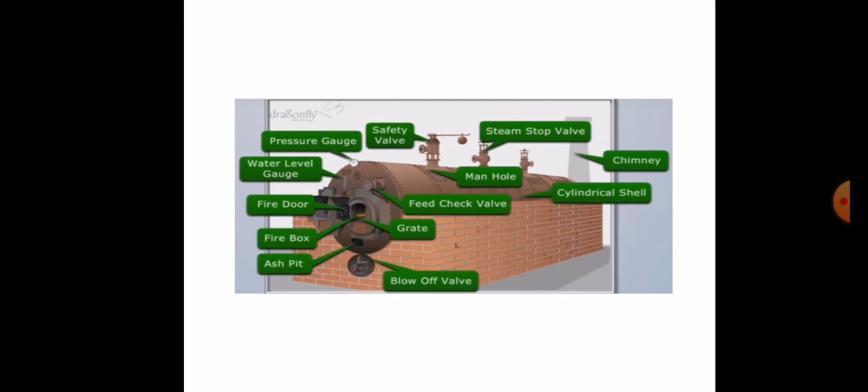First of all, basically you must know about the function of mounting, and where it is used. So over here you can see boiler mountings. Mountings means what? These are the necessary devices without which we can't operate the boiler, and also safety purpose is required for this type of mountings. So basically we can say, without mounting we can't operate the boiler.

Over here you can see following are some of the important boiler mountings. First one, this is the water level indicator. What is the function of water level indicator? Just the name is enough. Indicator means it indicates the level of the water inside the boiler or drum.

Second thing, this is the pressure gauge. Pressure gauge means it measures the pressure of steam. Generally we can say pressure is equal to force by area, but particular pressure gauge means whatever steam will be generated through the boiler, at that time how much amount of pressure we want to see, for that pressure gauge we are using.

Third thing, this is the safety valve. Safety valve means what? Suppose the steam pressure increases beyond the range, so at that time safety valve will be operated, and you can recover from this type of high pressure. So four types of safety valve we are using, which we will discuss later, but four types we will consider: dead weight safety valve, lever safety valve, spring loaded safety valve, and high steam low water safety valve.

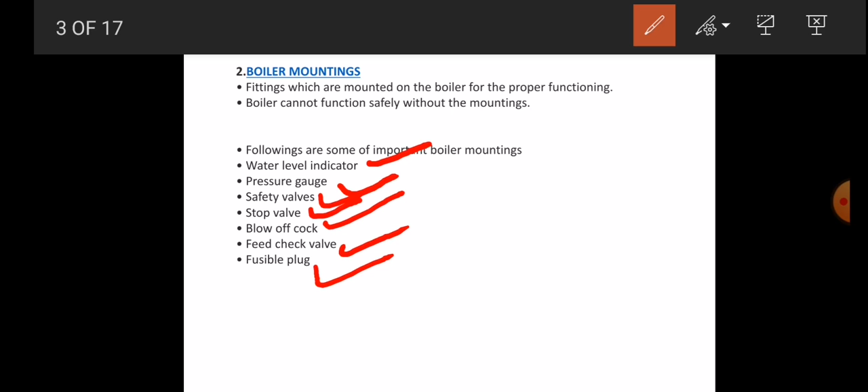So these are, we can say, the boiler mountings. And mountings are the necessary devices, as I already told, so without mounting we can't operate the boiler.

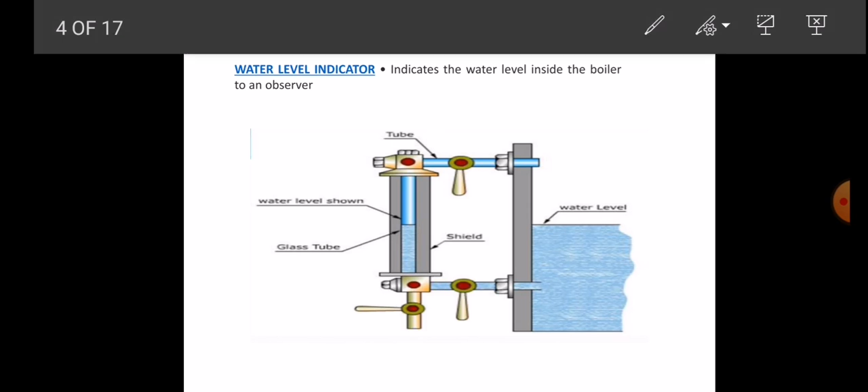So further we can go ahead. This is the water level indicator, already I told. So over here this is the figure. So this is the water level, and on the upper side you can see this is the steam. Over here this type of glass tube is present.

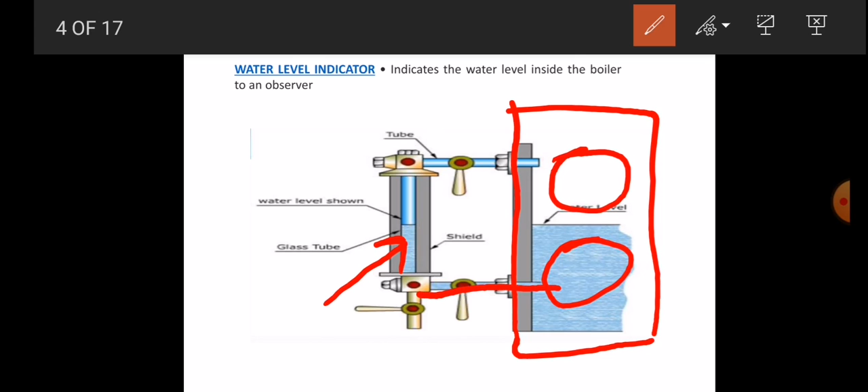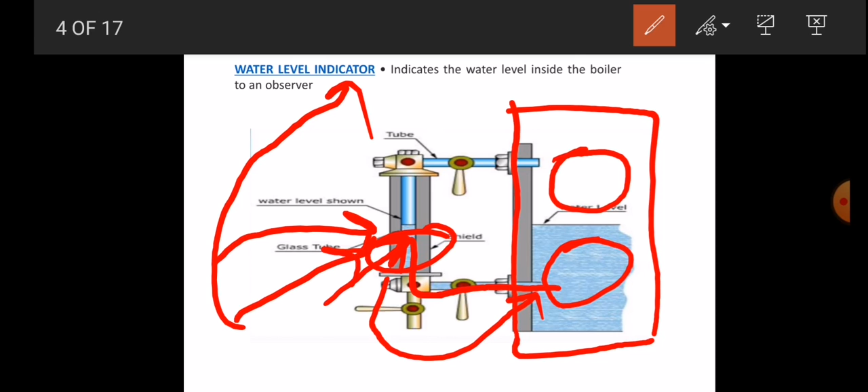So suppose this is our boiler shell, in which we are feeding the water. So how much amount of water will be filled inside the boiler drum, that water will go into this glass tube, and we can easily observe how much amount of water is filled inside the boiler or drum. So this is how we know about the level of the water, which is the main function of the water level indicator.

So further, pressure gauge.

So generally in boiler we are using Bourdon tube pressure gauge, which measures the pressure inside the boiler steam. So generally over here you can see this is the Bourdon tube pressure gauge.

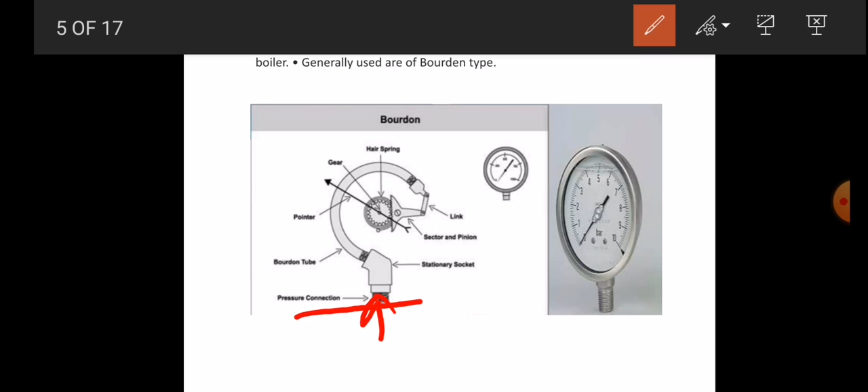So over here how it works, this is the pressure connection. This is the boiler where steam will be generated. So steam will go into this direction, and you can see this is the Bourdon tube, this shape.

So the pressure of the steam, which goes into this tube in this direction, at that time this link is directly connected with the Bourdon tube. So whenever steam goes inside the tube, a little bit of pressure will be generated, and due to that, this pinion will also move in this direction.

Over here you can see this is the gear, and both are connected with each other. So when the pinion moves, the gear will be rotating. With the help of the gear, there is one pointer known as the needle, and the needle will also rotate in the upper direction.

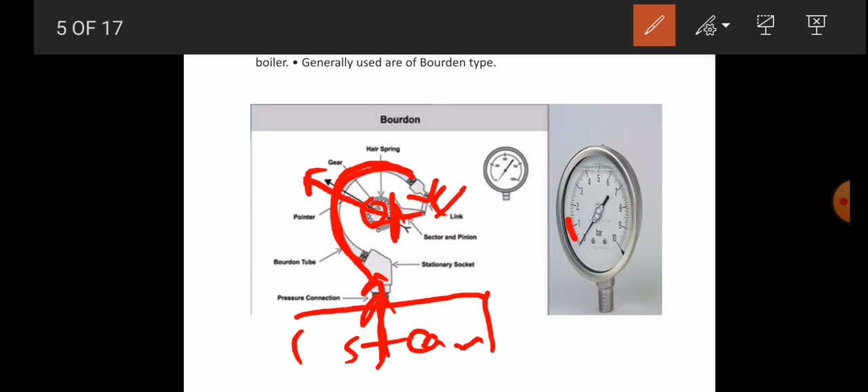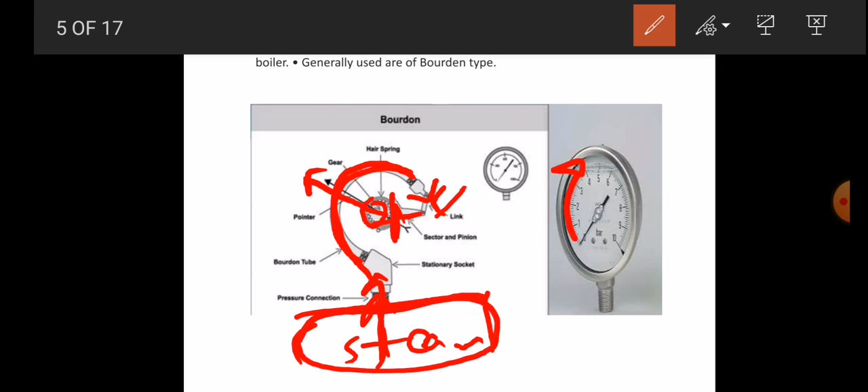So this needle goes into the upper direction, and generally we can consider this amount of pressure is the steam pressure generated. So this is the basic function - the pressure gauge indicates the pressure inside the boiler or drum.

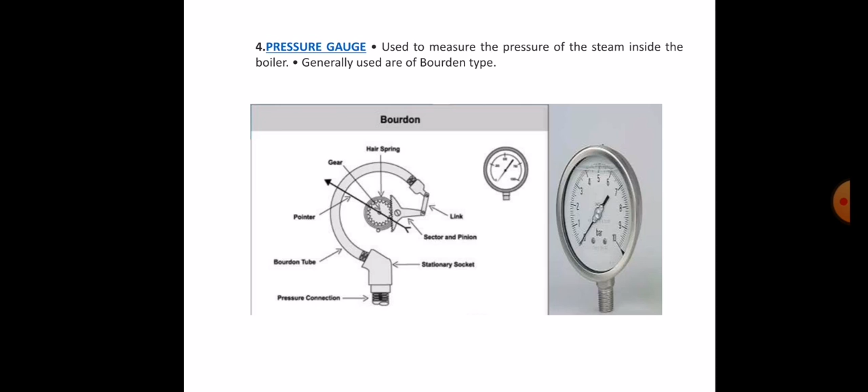Okay, further we can go ahead. Safety valve, which I already told you where it is used and its location. So four types of safety valve. Excessive internal pressure of the steam will be reduced through this valve, that's why it is called the safety valve.

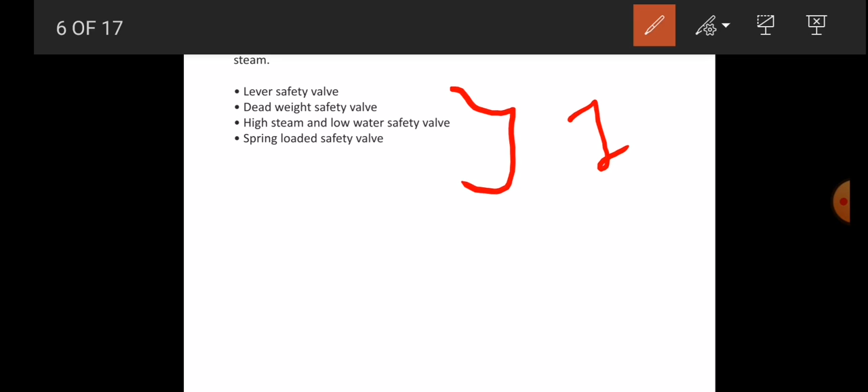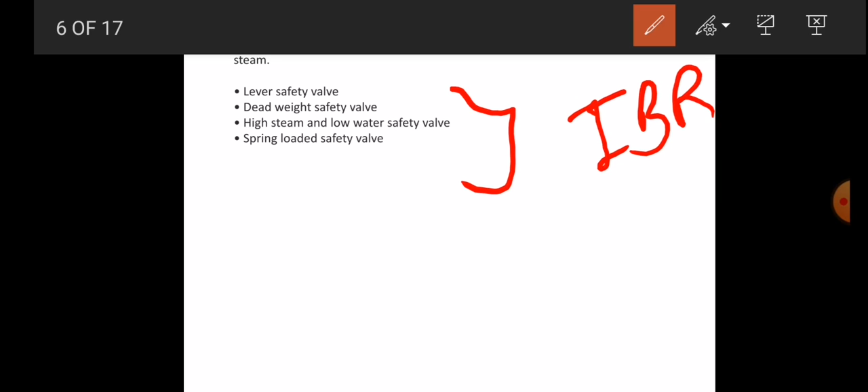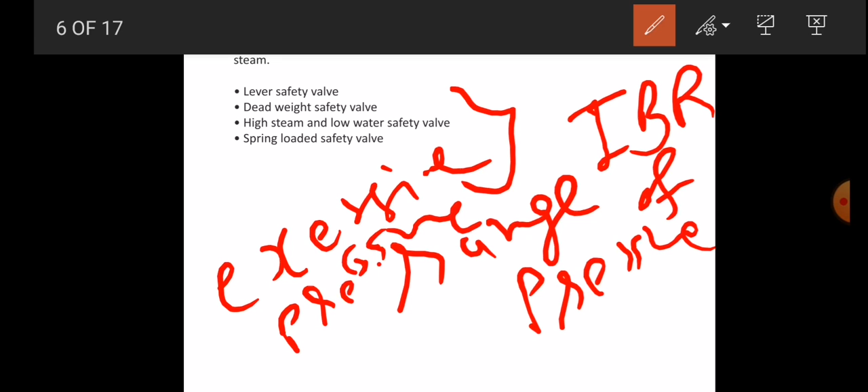So why is a safety valve required according to IBR? We all know about the classification of the boiler. According to IBR, there is a recommended range of pressure. Suppose the pressure increases above the range for that particular boiler, at that time the safety valve will work, and excessive pressure will be reduced or displaced from that particular boiler. That's why this type of safety valve is used.

Okay, over here, lever safety valve - one lever is there, one end is fixed. Dead weight safety valve - it is also used at home, like in a pressure cooker. So in between we are using the dead weight safety valve.

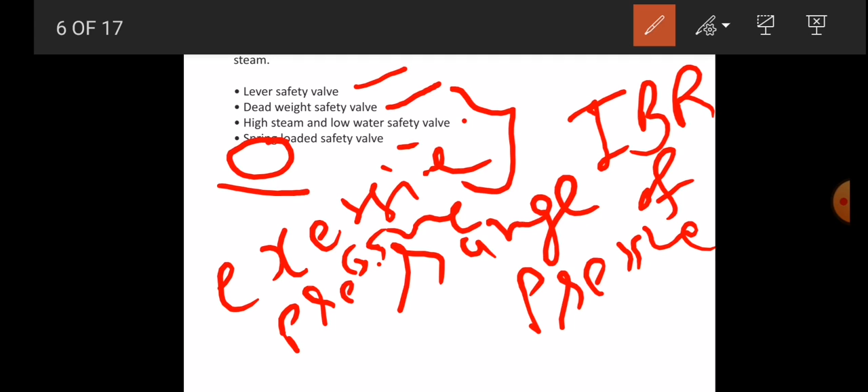Okay, high steam and low water safety valve and spring loaded safety valve. Spring loaded safety valve basically uses a spring, that's why it is known as the spring loaded safety valve. So safety valves are used in a particular boiler to remove that excessive pressure. Okay, further we can go ahead.

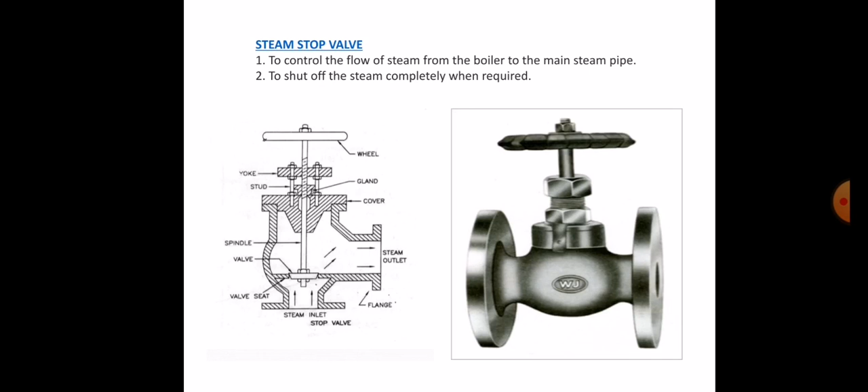Steam stop valve - over here you can see it controls the flow of steam from the boiler to the main steam line. Otherwise, we can use it to shut off the steam completely when required.

So over here you can say this is the handle, or we can call it the wheel. With the help of the hand wheel we can control that. It is connected with the spindle - this wheel is connected with the spindle.

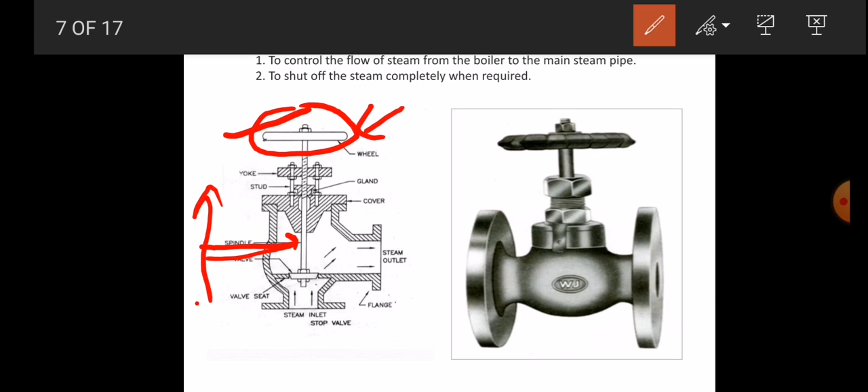So whenever it is rotated by us, the spindle goes up and down direction. So in this up and down direction, whatever steam goes inside, the spindle goes into the upward direction, so steam will go in this direction. Over here we are using a gland for the packing purpose, for the leakage purpose.

So steam is connected with the steam pipe, and the steam pipe is directly connected into the steam turbine where we use this steam.

So whenever steam is not required, this hand wheel is also rotated, so the spindle goes into the downward direction and gets fixed, so no steam will be passed through this direction.

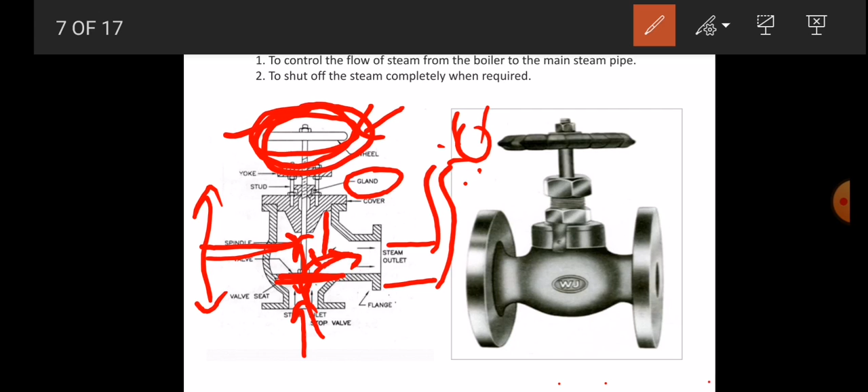So whenever steam is required, at that time we are using the steam stop valve to regulate the steam. Okay, further we can go ahead.

Blow off cock. What is its function? Whenever we need to empty the boiler, suppose whatever water is inside the boiler or drum, and we are cleaning inside the boiler or drum, at that time water will be emptied through the blow off cock to discharge the mud, scale or sediments which are accumulated at the bottom of the boiler, right? So over here you can see this is the blow off cock, for removing the dirt material, as I already told you. So this type of figure, right?

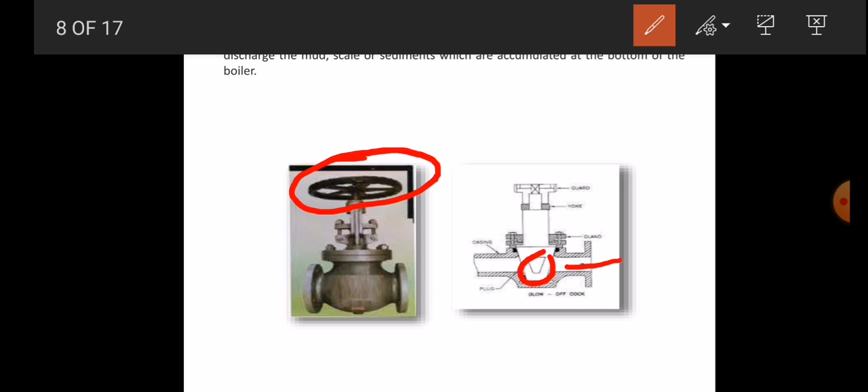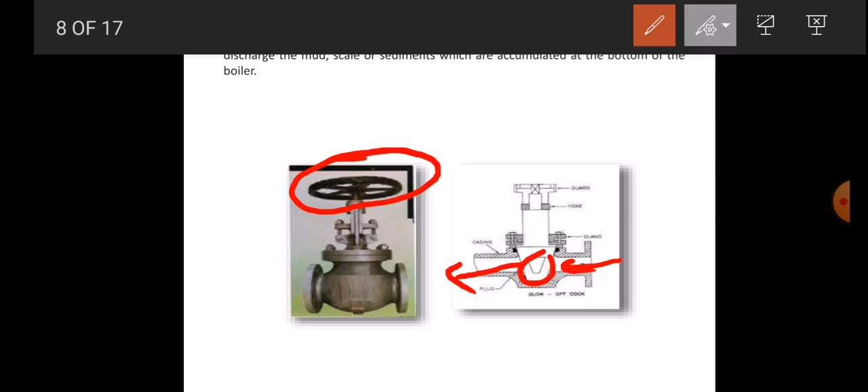Over here you can see this is the wheel. Whenever it is rotated, this type of block will go in the upward direction, and whatever mud is there will come out. So blow off cock is generally always mounted on the lower side of the shell, because, as we all know, due to gravity some sediments or foreign particles are always deposited inside the boiler or drum at the lower side. So due to the blow off cock we can remove all that dirt, scale or sediments.

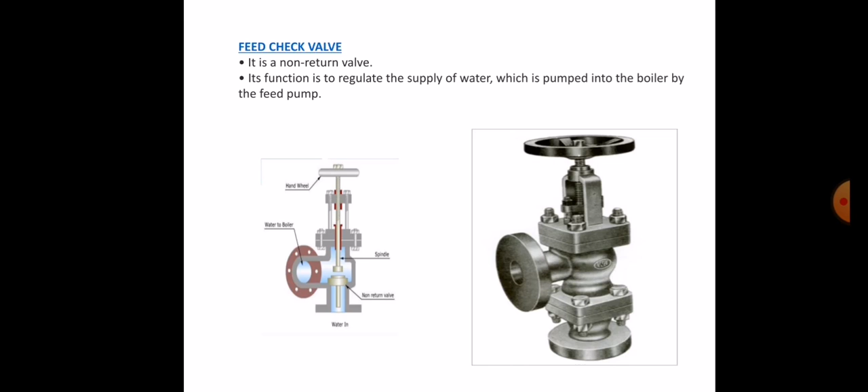Okay, feed check valve. It is a non-return valve. Its function is to regulate the supply of water which is pumped into the boiler by the feed pump, right? So a pump, basically, is a device which moves liquid from one place to another, but over here through that particular feed check valve we are inserting the water into the boiler, right?

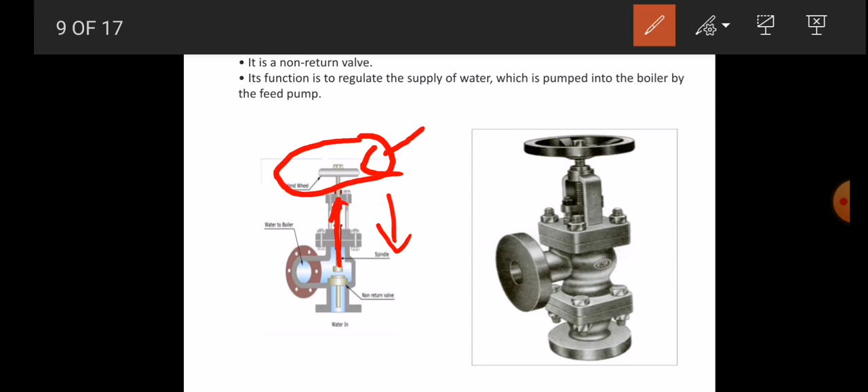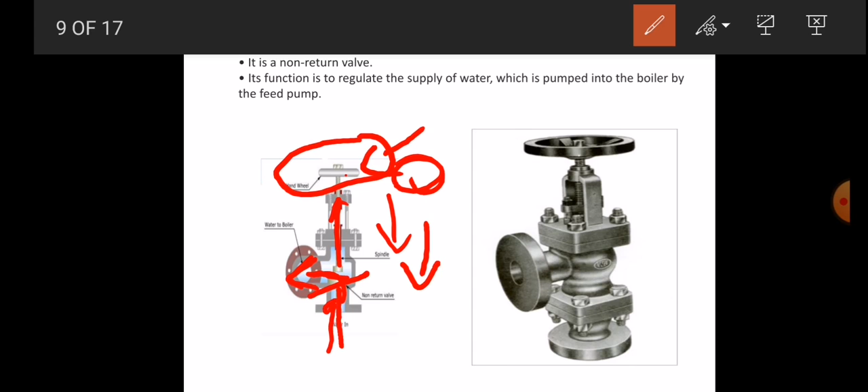So over here also you can see this is a hand wheel. Whenever it is operated by us, the spindle moves in the upward as well as downward direction. Whenever it goes in the upward direction, whatever water is there goes into the boiler drum. Whenever it is rotated in the other direction, the spindle goes into the downward direction, so it gets fixed and no water goes into the boiler. So the feed check valve generally supplies or regulates water inside the boiler or drum.

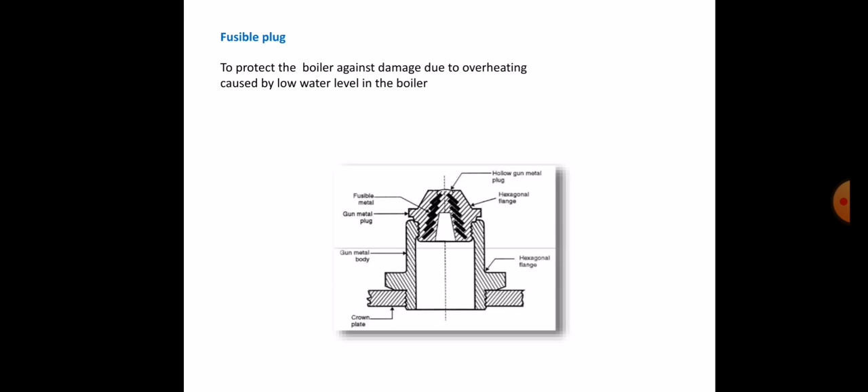Okay, further we can go ahead. Fusible plug - as already told, its function is to protect the boiler against damage due to overheating caused by low water level in the boiler. We all know that in the boiler we are inserting water, right? So after giving heat, what happens? Water converts into steam, so the water level will be reduced after some time, right?

So at that time, suppose the water level is reduced, but in spite of that we are still supplying heat, right? So this type of overheating problem may occur. So over here you can see the figure - here the hexagonal flange, this is one portion, this is the second portion, and in between, over here, you can see this in black color, this is a fusible metal.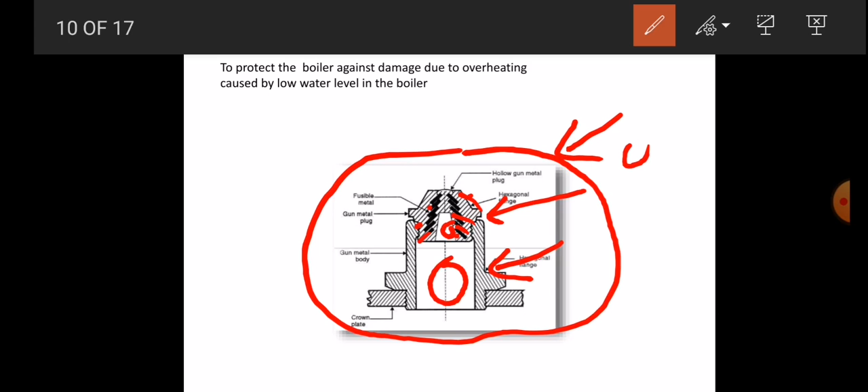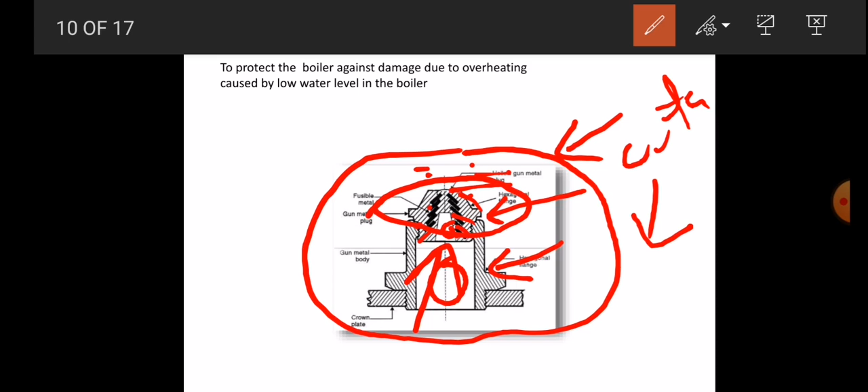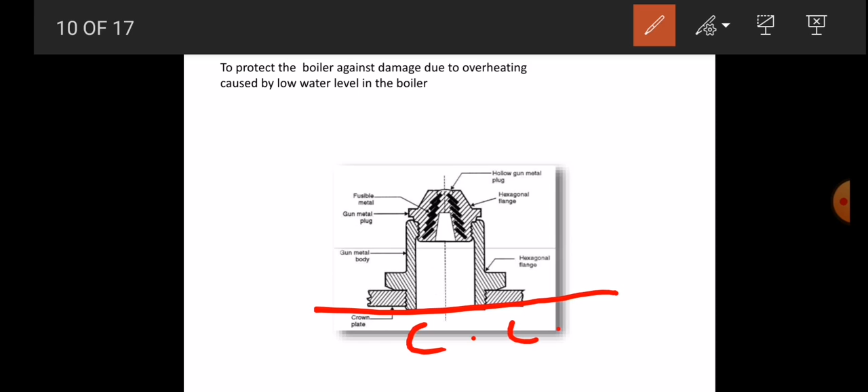So initially it is totally covered inside the water, but whenever the water level is reduced, this upper portion becomes uncovered from the water. At that time, when you are supplying heat, this fusible metal will melt, and whatever remaining water is there goes inside the combustion chamber. So over here you can see, in between, the combustion chamber - a little bit of water goes into the combustion chamber, and at that time the fuel combustion stops, reducing the overheating problem.

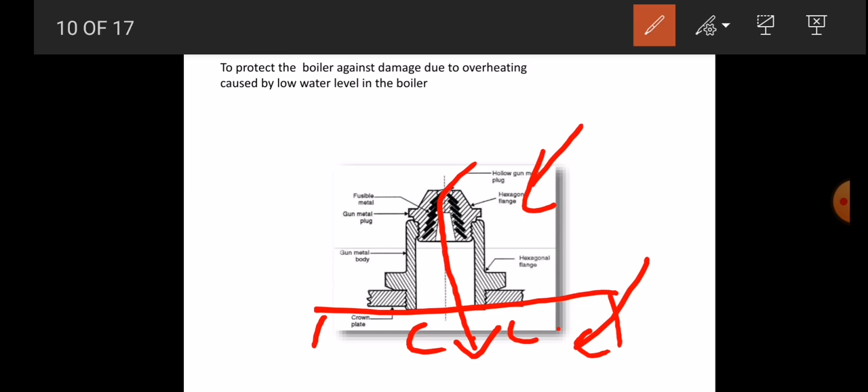That's why we are using the fusible plug, and the fusible plug is always mounted on the combustion chamber, because in the combustion chamber we combust that particular fuel. Now, fuel means what? Fuel is a substance composed mainly of carbon and hydrogen and produces a large amount of heat when burning with oxygen. Okay, so this is the fusible plug.

After this we are going to boiler accessories. Mounting, the necessary devices, we all know without mounting we can't operate the boiler. But boiler accessories are the devices we use to increase the efficiency of the boiler.

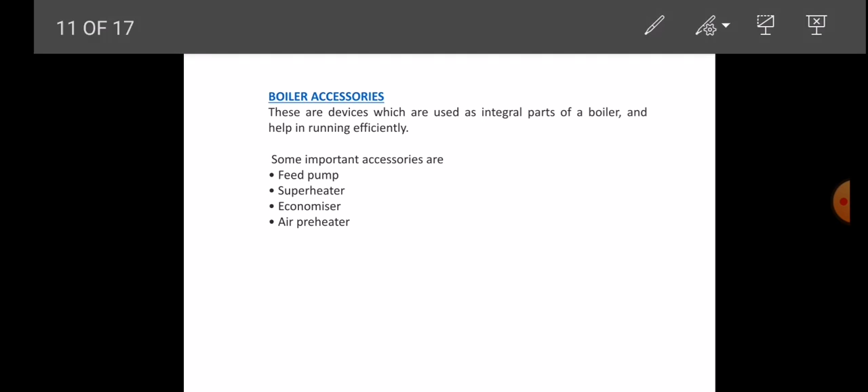So some important accessories you can see here: feed pump, superheater, economizer, and air preheater. This type of accessories will be discussed one by one.

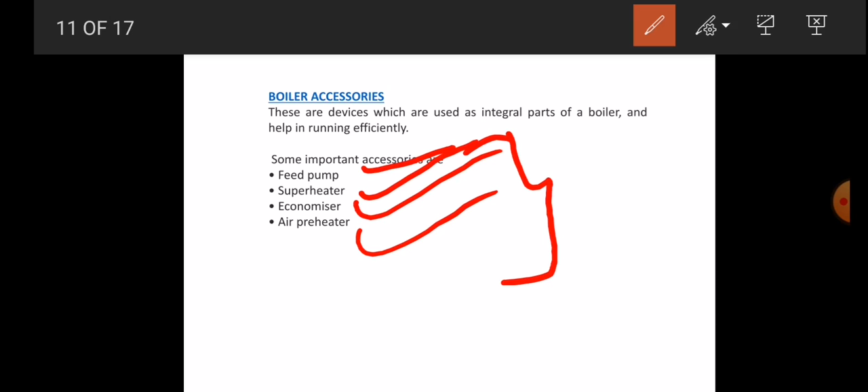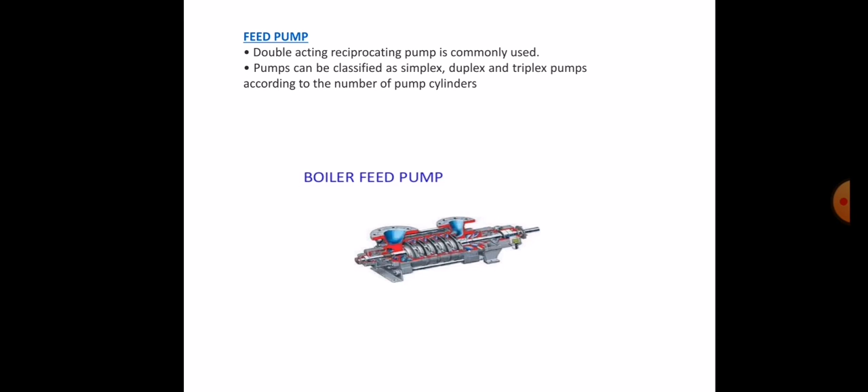So here is the feed pump. Double acting reciprocating pump is commonly used. Pumps can be classified as simplex, duplex, triplex pumps according to number of pump cylinders. So boiler feed pump - just the name is enough.

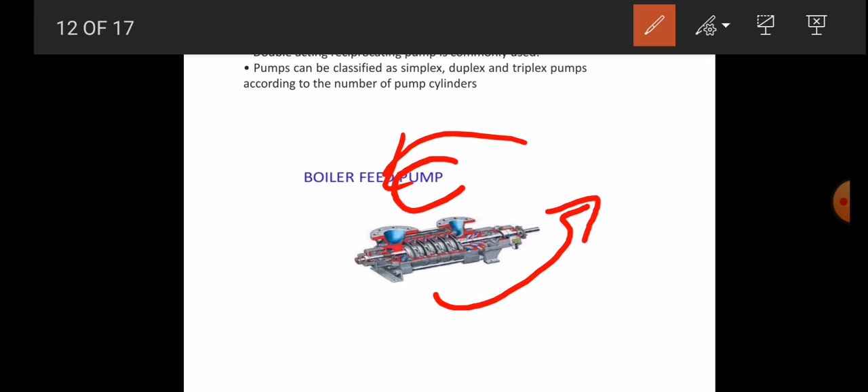Feed means to insert the water. The pump is a type of mechanical device. With the help of the pump we increase the particular pressure of the water. Whenever we apply the particular water inside the feed pump, we basically increase the pressure of that water which goes inside the boiler or drum.

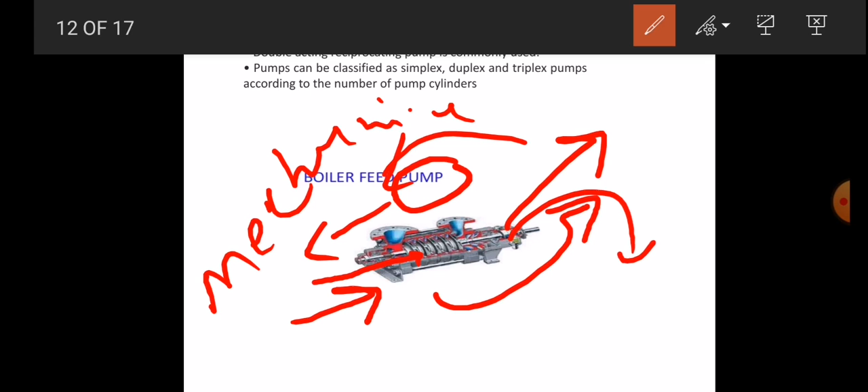Pumps may be classified as reciprocating pump, rotary pump, piston pump, plunger pump, bucket pump - these are the classifications. But here we see the boiler feed pump, where water passes through this direction and goes into the boiler shell or drum.

Further we can see the superheater. This is important, or we can say crucial part. Suppose you want to increase the boiler efficiency - we know that from the boiler we can generate steam. So that steam initially generated contains so many water particles, so we call it wet steam.

That wet steam will increase in temperature when we use the superheater. Here you can see this red line - this is the heat, and this line is the water. But we know from the second law of thermodynamics, heat always flows from higher temperature to lower temperature. So the water temperature will be lower and heat temperature will be higher.

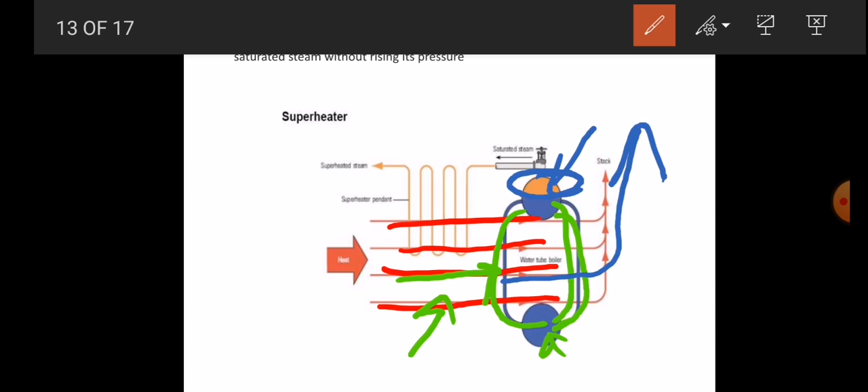So what happens - this heat, whatever temperature, is absorbed by the water. So here you can see this is the steam - why is steam generated? Because the heat of the flue gases is absorbed by the water and the water converts into steam. That's how steam is generated here, and after this the heat goes into the chimney, into the atmosphere.

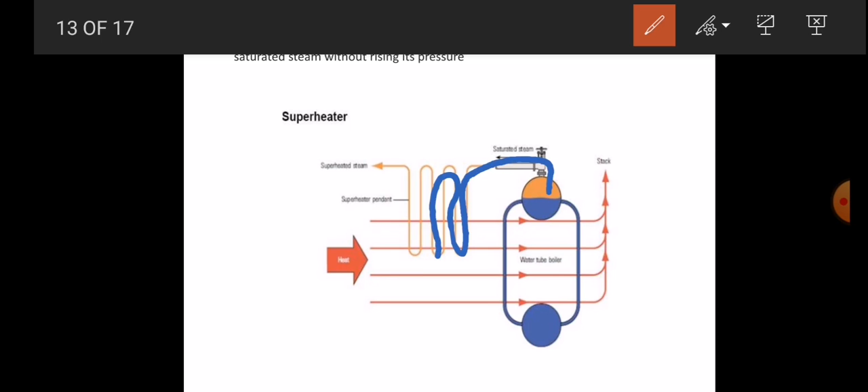So after this, steam passes through that particular tube, which is also connected with this head. Whatever steam is generated here has a certain temperature, and though it contains so many water particles, we are also passing that steam in between the hot flue gases.

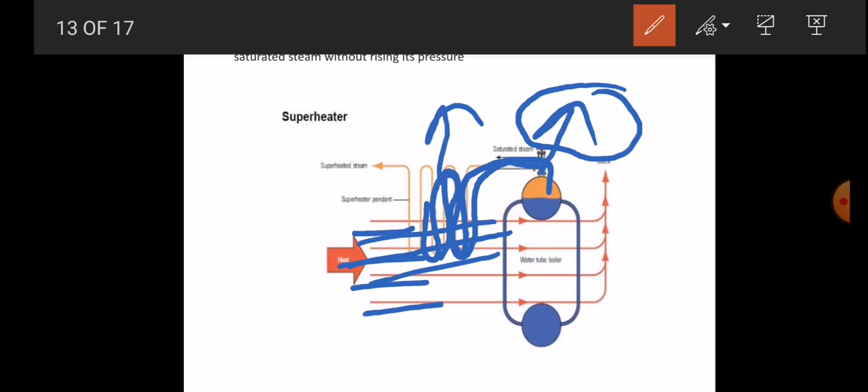At that time, the steam temperature increases. So the water particles are removed and superheated steam is generated and passes over here. That superheated steam we throw onto the steam turbine, and at that time the steam turbine rotates.

Suppose directly wet steam goes onto the steam turbine - at that time water particles will stick onto the turbine blade, so corrosion may occur. That's why we always introduce superheated steam. So basically the function of the superheater is to increase the temperature of the steam.

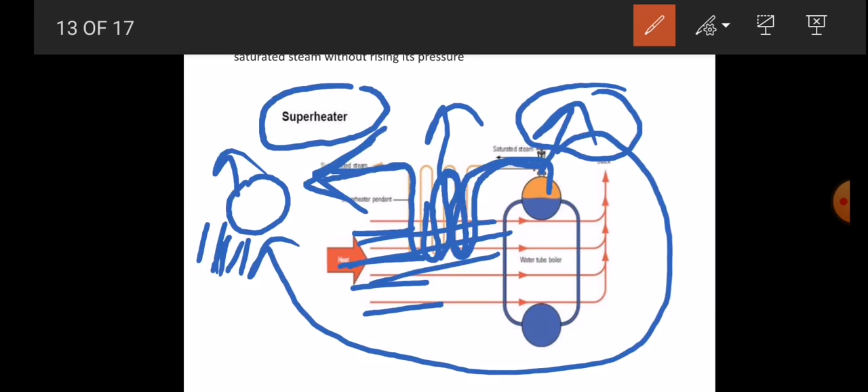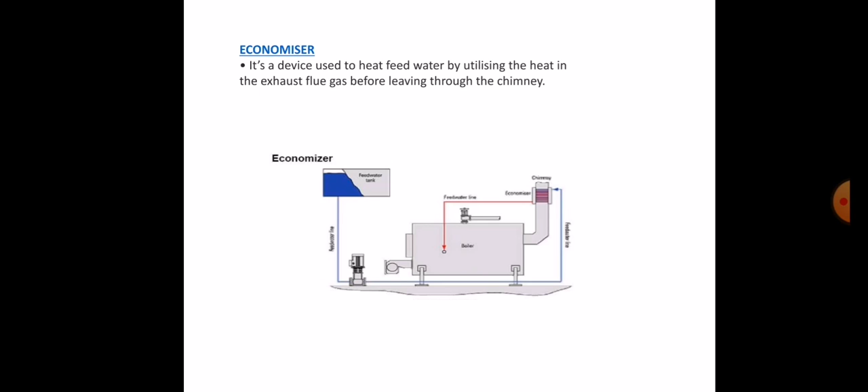Further we can go ahead to the economizer. What is the function of economizer? It is a device used to heat feed water by utilizing the heat in the exhaust flue gas before it leaves through the chimney. So here you can see the economizer.

So basically the economizer is one type of line for feed water, which is connected - you can see this is the chimney. Whatever feed water we are supplying passes through the economizer - here you can see this is the economizer.

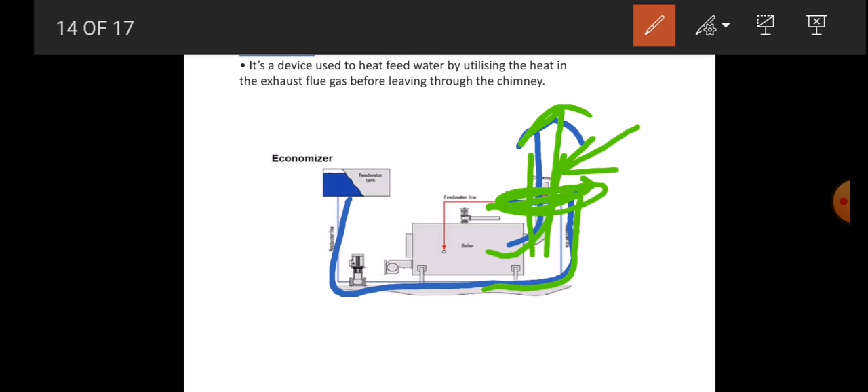Yes, this is a chimney, but in between we are inserting the economizer. We know that hot flue gases go from the chimney into the atmosphere, but as feed water passes through that particular way, the hot flue gases' heat will be absorbed by the water, and that water will be heated, which then goes inside the boiler drum.

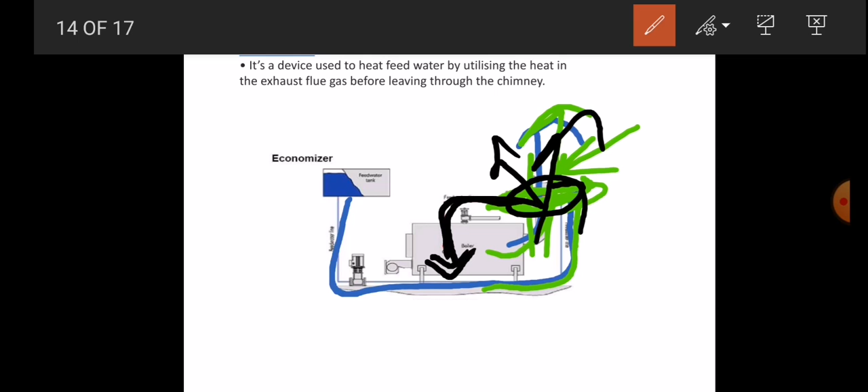Basically we know that in a boiler we are just supplying heat for water to convert into steam, but for increasing efficiency we recover the heat. That hot flue gas going into the atmosphere has its heat recovered, and we use that recovered heat to increase the temperature of feed water. So whenever that slightly hot water goes into the boiler, it will quickly generate steam. That's why we use the economizer, whose main function is to increase the temperature of the feed water.

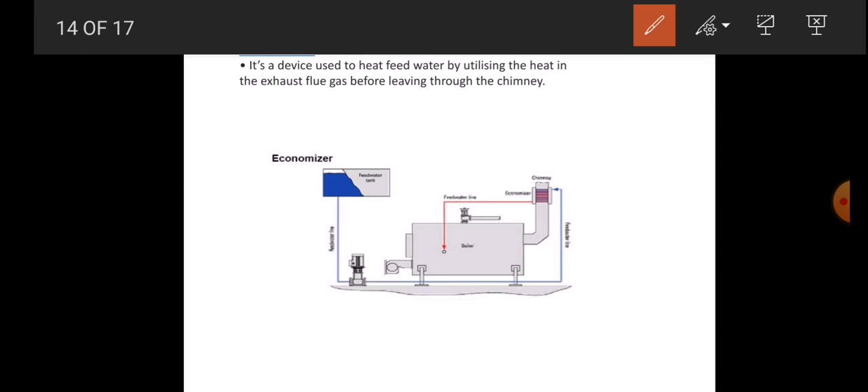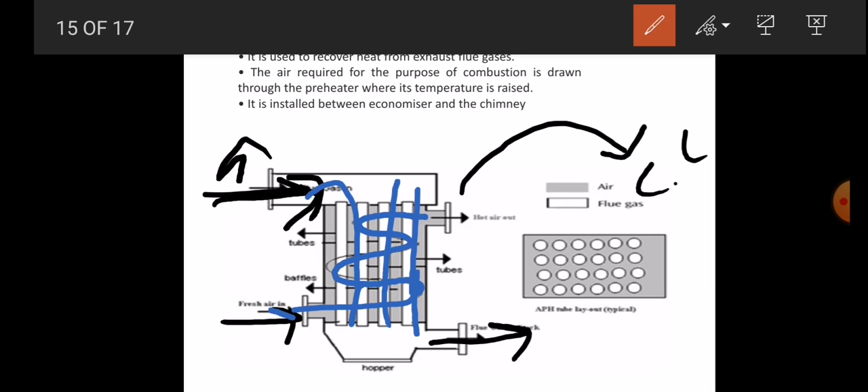Fresh air is supplied here, and as it connects with the flue gases, whatever heat or temperature the flue gases have will be absorbed by the fresh or cold air. As cold air passes through that way, it becomes hot. That hot air is then introduced into the combustion chamber, allowing us to generate the fuel efficiency and heat more quickly. That's why the air preheater is required.

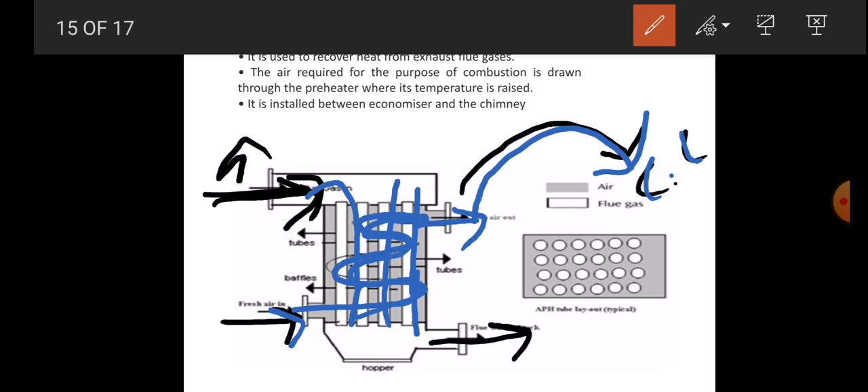Just the name is enough to explain it: air preheater. Before we enter air into the combustion chamber, it will be preheated. That's why it's called an air preheater.

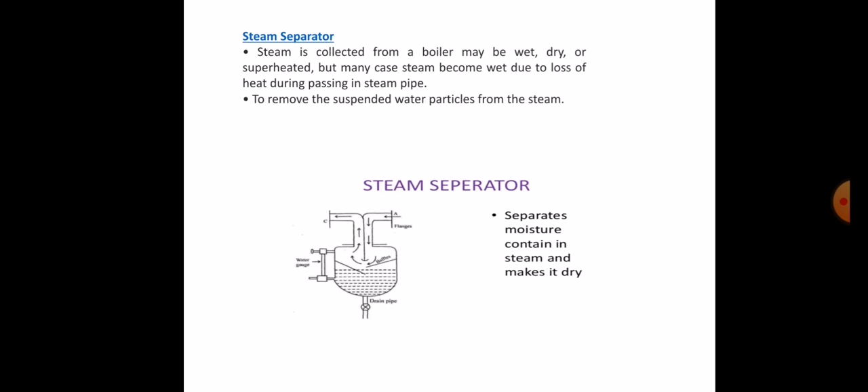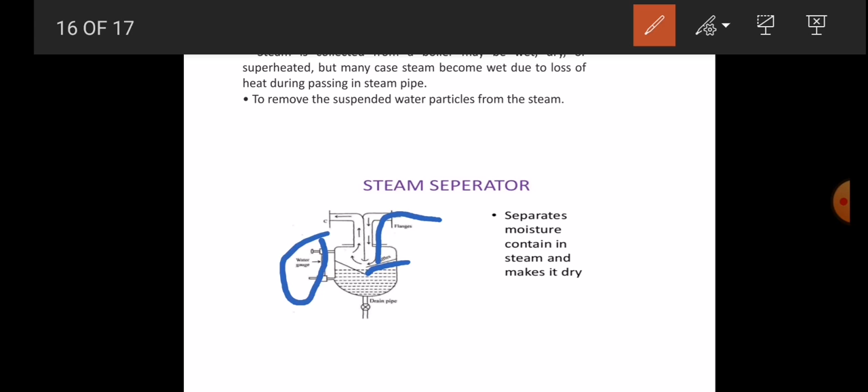So here you can see the figure of a steam separator, with a water gauge over here. Whenever steam passes through, there will be a baffle, and the steam will directly attack that particular baffle. At that time, the water particles will pass due to gravity and go inside the drum.

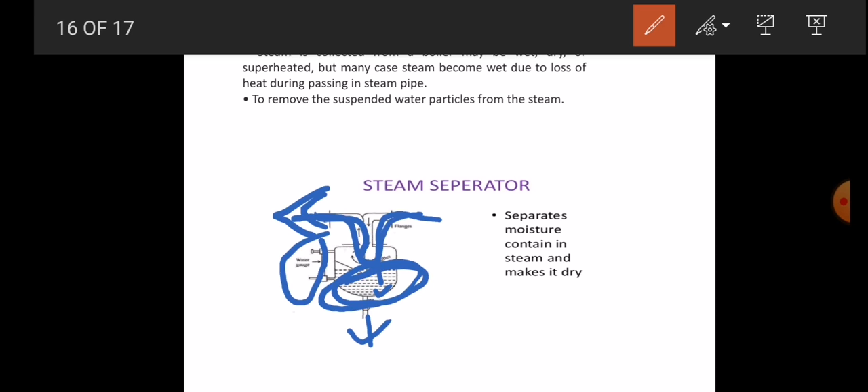After that, only dry steam is selected, which goes in this direction. The water particles accumulate here, and afterward the water goes through the drain valve. So the steam is separated properly and goes in its direction, while the water particles are collected separately—that's why it's called the steam separator, as it separates the steam from the water.

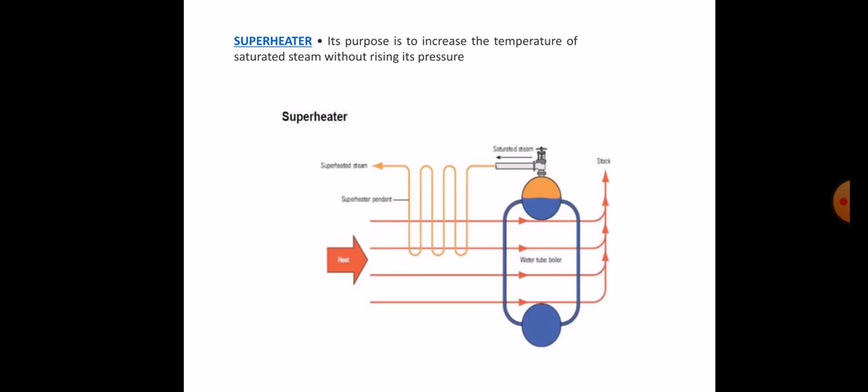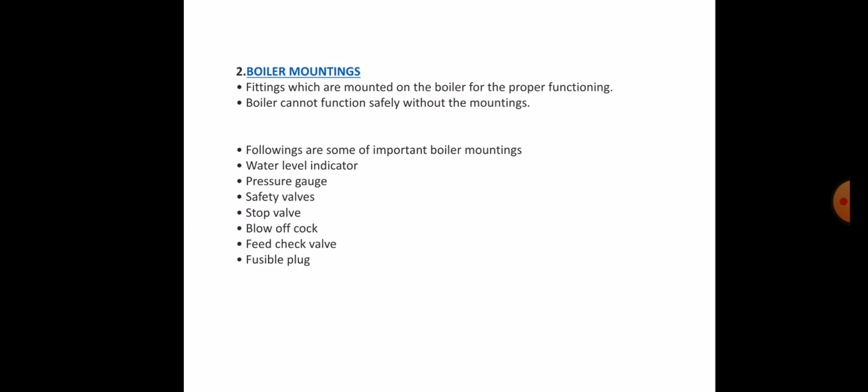So over here we have discussed so many things about the boiler and its mountings. Boiler mountings—without mountings we can't operate the boiler, and for safety purposes mountings are required. Mounting means a device which is mounted onto the boiler shell. Boiler accessories we've already discussed—these are devices with which we can increase the efficiency of the boiler.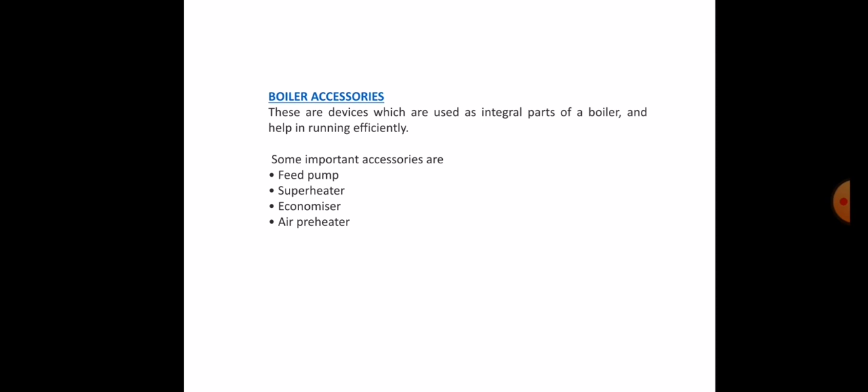So whenever we talk about the boiler, these two things are required: for efficiency purposes accessories are required, and we all know that without mountings we can't operate the boiler. These are the mountings, which are the necessary devices. Okay, thank you.